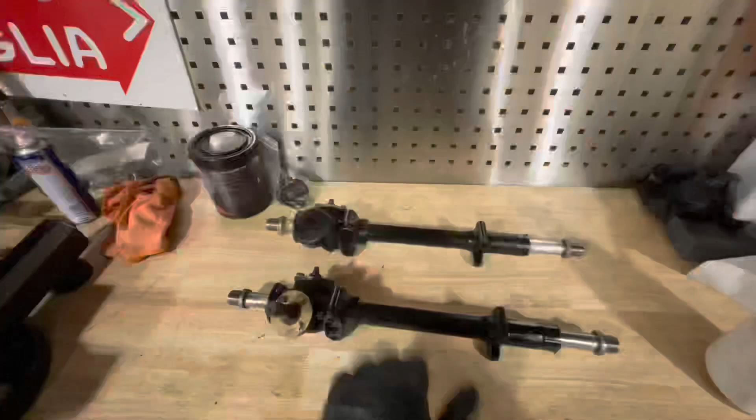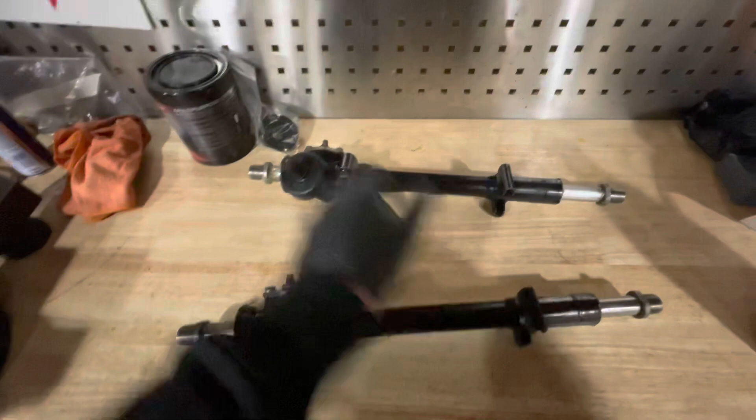In this episode, we are going to mount the front suspension. But before we do that, let me show you what I've got on the bench. I have finished rebuilding these two steering racks. This one is my old rack that came off my Turbo, and this is the rack that came off of the Safari. There are just a couple of things I need to finish, and that is equip it with a couple of new parts. One is a new cap and the other one is a new stopper for the centering bolt. So let's quickly get this done and then we'll get back onto the front suspension.

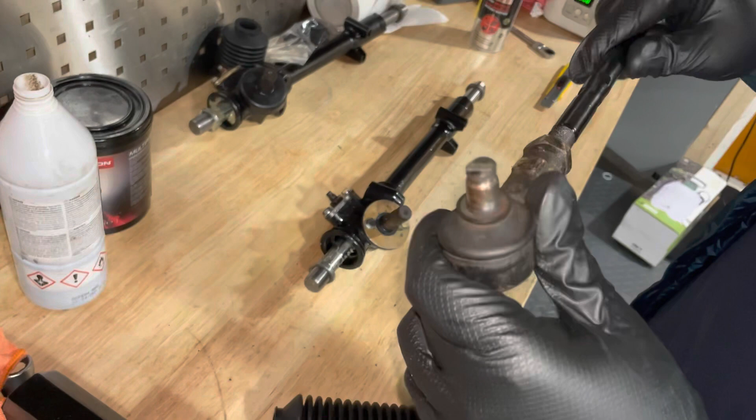Alright, so for those of you who have been following along since the beginning, you will know that I have new ball joints for my tie rods, and the reason for that is because I cut this ball joint nut off in order to get this out of the car. So I've already loosened this up and I'm just quickly going to screw this off.

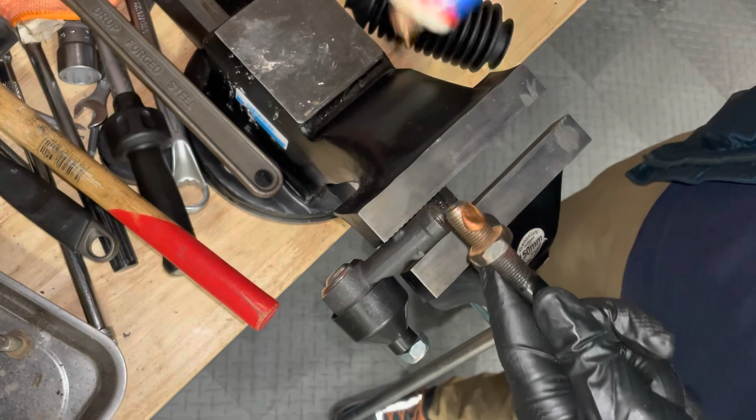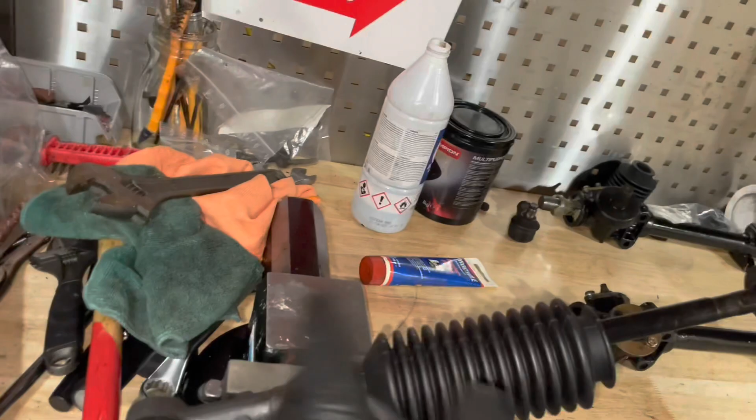Alright, so the new ball joint's onto the tie rod and the new bellows is also onto the tie rod. It's easier to do this before you put the ball joint back on, otherwise you have to stretch everything to fit. So once I've got the tie rod connected to the steering rack, we just cover it up with this bellows.

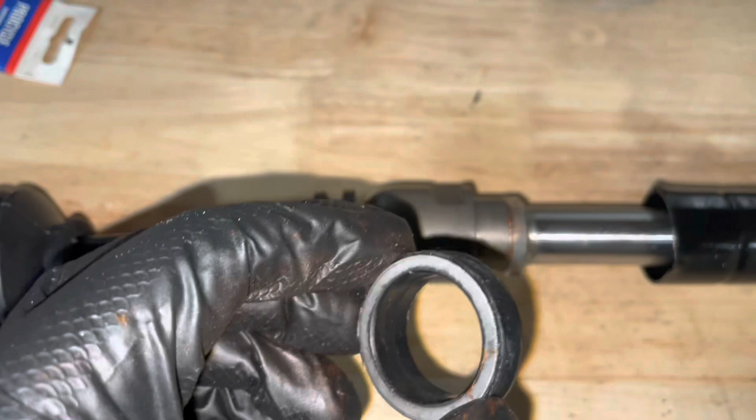Oops, I actually forgot to do something, which luckily I found now and not later, and that is to install the stop ring. And this stop ring was only issued after model year 78, I think, for 79 onwards. And what that does is it sits right on that collar there, and it stops the steering rack from going too far into the tube. So don't forget to put this on. I nearly did. Let's quickly remedy that.

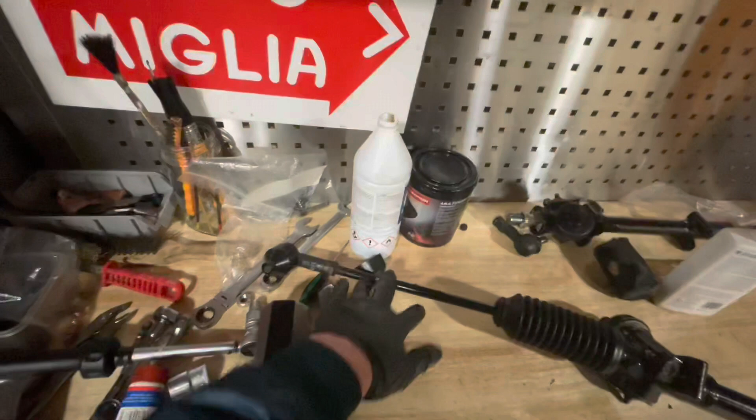Alright, that took a little bit longer than I thought, to be honest. But anyway, we have a rebuilt steering rack. Let's start from the one end. We have a new tie rod end or ball joint. We have rebuilt tie rods. Well, rebuilt, I've painted them. The joints were fine. Brand new bellows. The steering rack is rebuilt.

You can see I have an original Porsche stopper sitting in there. This is quite expensive. It was 20 bucks. I've got a new cap on the top. I have a new clamp holding the bellows onto the big side. I've got another new bellow, painted tie rod, and a new tie rod end. So all of this is now ready to go back on the car. But before we do that, obviously we want to first put in the front suspension. So let's get going on that.

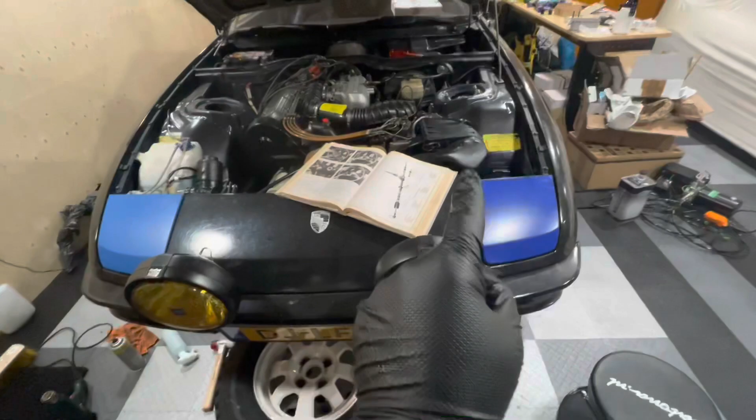I'm going to disconnect the brake calipers so that they can be sent off to be refurbished. I don't really have the kit to do it properly, so I'm getting them sandblasted, completely rebuilt, and then they'll go back on the car. So we'll disconnect them now. I've got a bottle to catch the brake fluid.

I've got some APC and a brush to clean out this wheel well, and once that's done, I've got some water in this bottle that I can spray it down with, and once that's all dry, I will paint it with a bit of stone chip to make sure that it doesn't corrode, and once all that's done, the suspension is going in. So stay tuned.

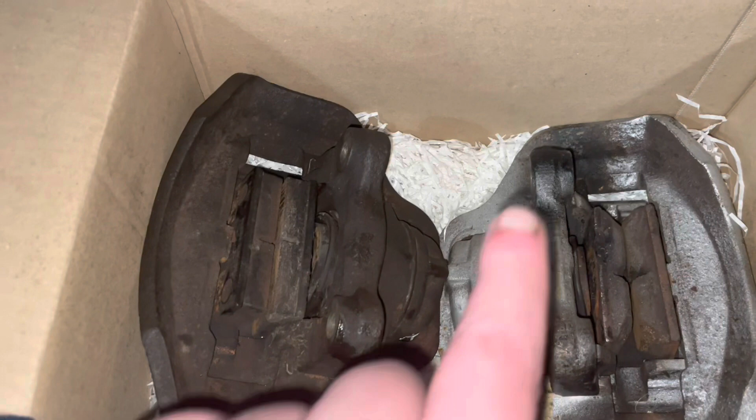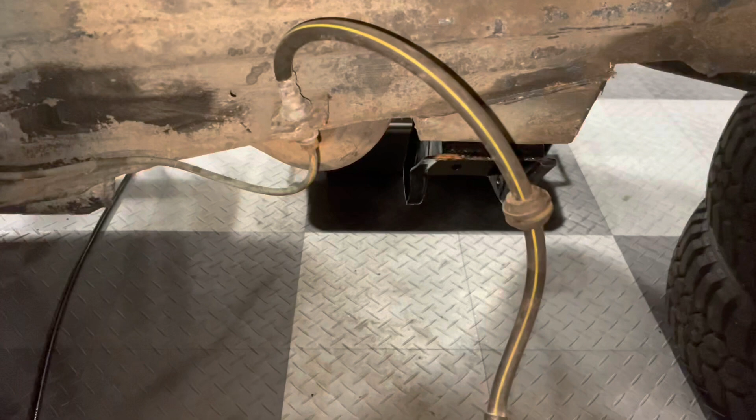Alright, so as always, nothing ever goes 100% smooth on this car. This one came off within a minute. This one took me about an hour, and I have now mangled the hose that it was hanging on, which is this guy. It's not too bad, but in the end I had to get a vice grip on it to get it loose. So while these hoses are actually not bad, I am now also going to replace them because why not, right? We're in this deep already. And I think this also shows you how much work I have with the cleaning to do.

All right, so that cleaned up quite nicely. This is the right-hand side wheel arch, all cleaned up, and I've sprayed it black. Not out of choice, but because all three other arches were black, so it would have been weird if this was still blue. So now it is black, and I'm letting it dry. And once it's dry, I'll give it a protective coating.

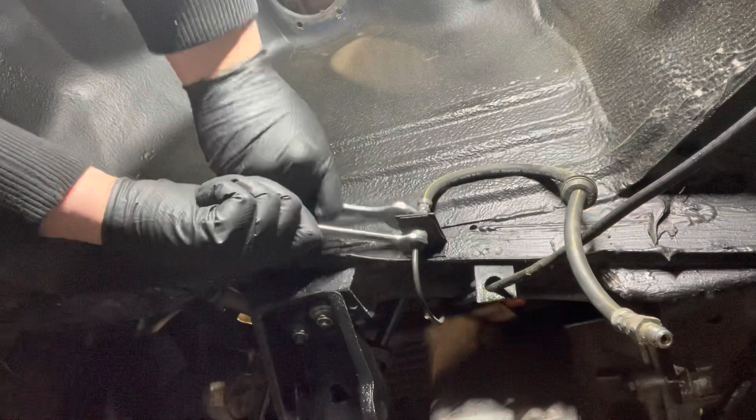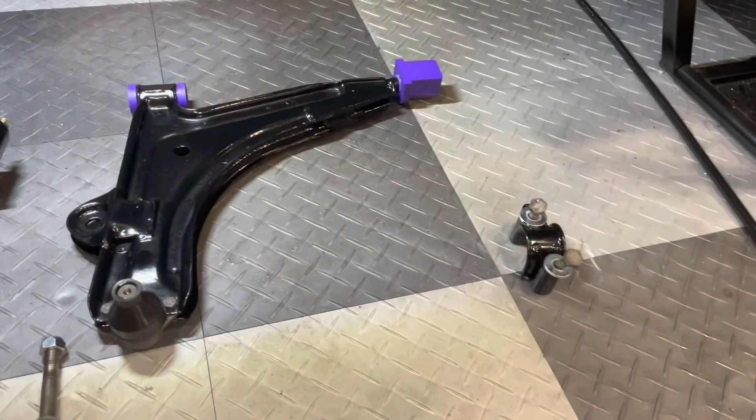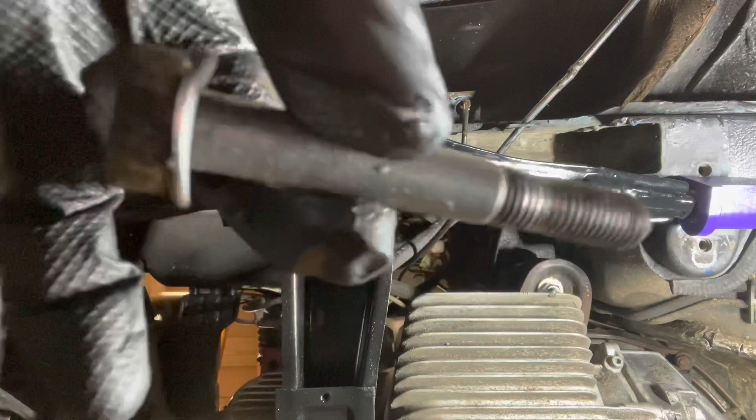So the wheel arch is now cleaned and it's put into some wax. So that means we are ready to install an A-arm, caster blocks and a strut. All right, let's see if we can wiggle this guy in there. Yeah, that seems to be working. All right, will you stay? Yes, you will stay. Make sure that before you insert your bolts, you put some copper slip onto them. This will stop them from corroding in future.

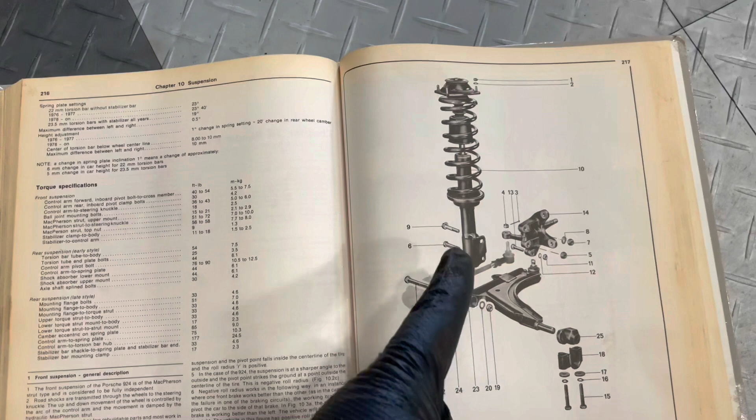Alright, since it's been quite a while since I've taken this apart, I thought it's a good idea to just have a look at the way that this is supposed to go together. Not so much the big components, but I was more interested in how the bolts go in, which way they need to be pointing. And it's now clear that the bolts go in from the front of the car with a nut at the back. That's the first thing we have to do. And the same actually goes for the strut. The bolts go in from the front with a nut sitting on the back.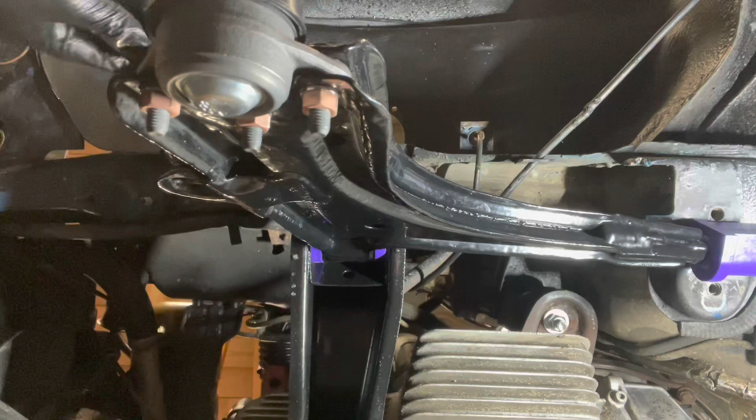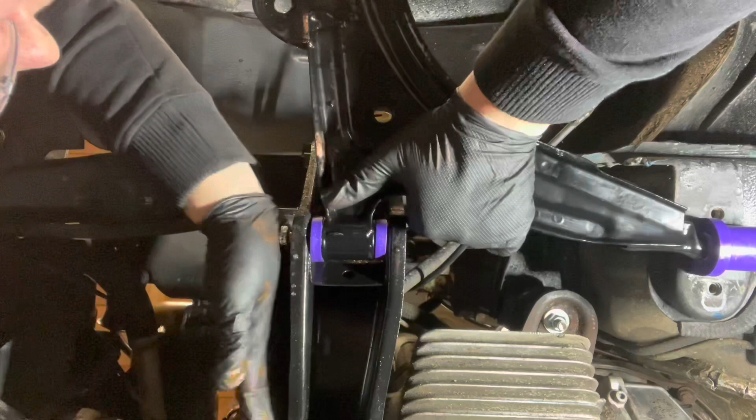Alright, so I've put some copper slip on the bolt and it needs to come in from the front. There we go. Yes.

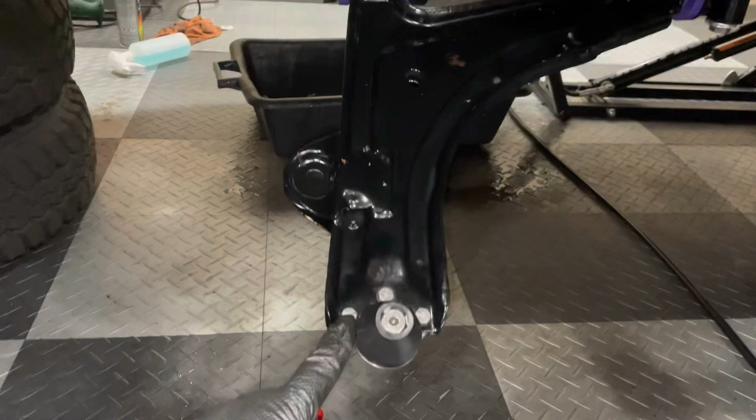All right, so the first A-arm is in. This is on the driver's side. It's just hanging there reasonably tight at the moment. You should only torque this up once you've got the car on its weight, but I've tightened them up sufficiently for us to continue working. So what I'm going to do now is install the strut up here and then get the ball joint to go into the hub and into the strut.

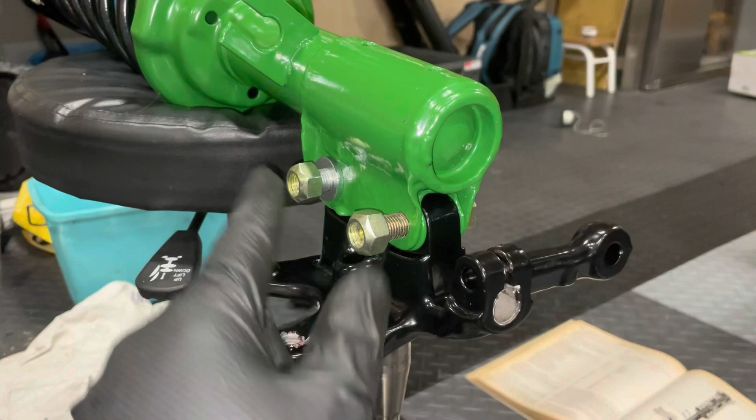Next job is getting the hub into the strut. And as everything has been powder coated, this is not as straightforward as you might think. So I need to bang it into place. Alright, after quite some wiggling, I've got the hub onto the strut. Now it's just a matter of tightening up these bolts and then we can get it onto the car.

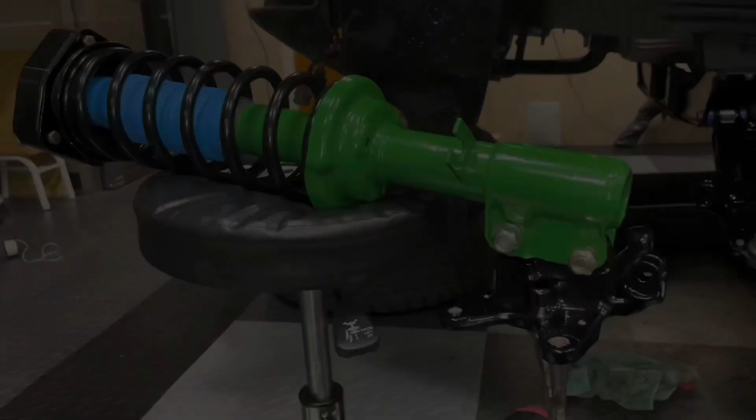Alright, she's not fully torqued up, but at least these nuts are where they need to be. So I'm going to get the strut into the car now and see if we can then bring the A-arm to meet into the hub right there.

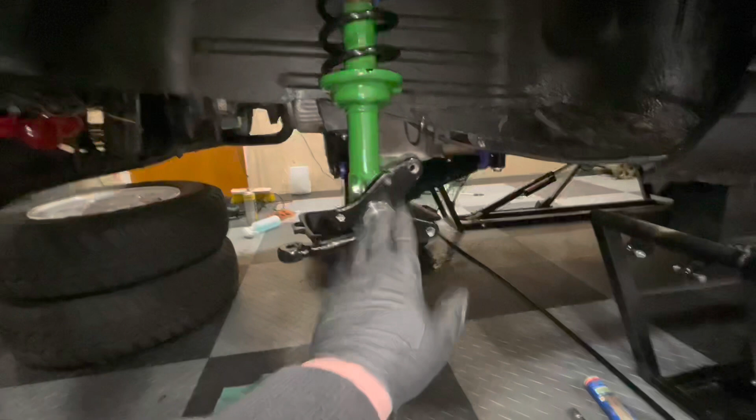Right, she's in. Took a little bit of manhandling, but she's in, and she's working well, as you can see. So I now have to just tighten up the nuts a little bit more. Once that's done, we are in essence done with this side. We still have to get the steering rack in. I have to put on the new discs, and I am sending away the calipers to be rebuilt. So it's going to take a while, but at least this is in. This is a step in the right direction, and I'm very happy with this.

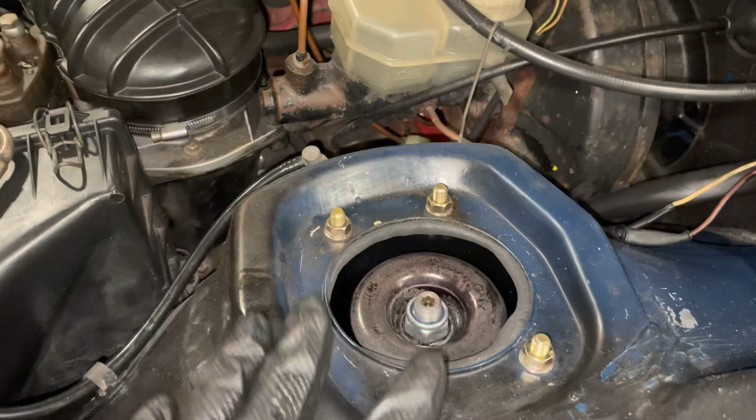I've got the speedo cable pulled through as well on this side, so we can drive the speedometer. And I have this all buttoned up. Again, nothing's torqued up. I'll torque this up once the car's on its wheels, but it's looking really, really good. So this is where I'm going to stop. I will do the other side during the week in the evenings. And when you join me next time, I should have them both in the car, and we can start building up the discs and the steering rack, and then we should be almost ready to drop her onto her wheels.